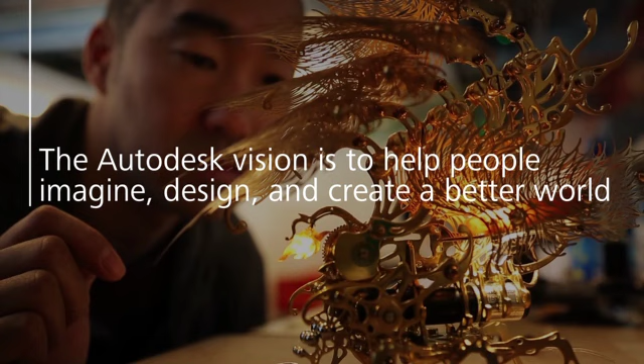Let's start our exploration about what's next with a look at additive manufacturing, not just for its own sake, but in the broader context of design and manufacturing. I want to talk about what additive manufacturing means, where it is now, and why it's so important as we enter the imagination age. Now, to paraphrase that old Hollywood saying, 3D printing and additive manufacturing have been an overnight success, 35 years in the making.

Actually, the basic idea goes back even further than that, all the way back to original science fiction movies and programs like Star Trek in the 1960s, where they had that great device called a replicator. It enabled you to make anything at any time instantly with just the touch of a button. That kind of idea and that kind of machine that could make anything you could imagine thrilled people around the world, including me. And most importantly, I think guys like these two, inventors back in the 1980s, guys like Chuck Hull and Scott Crump, who started trying to bring that inspiring vision of the replicator to life, establishing the basic concept of 3D printing.

And after years of steady development, just recently, I would say around 2010 or so, we hit some kind of inflection point, and 3D printing took off just like a shot. The media fell in love with it, and all that attention fueled the democratizing maker movement, helping grow companies like TechShop and MakerBot. All that attention was great, and in turn, it inspired all kinds of innovation. But it also led to some heightened expectations.

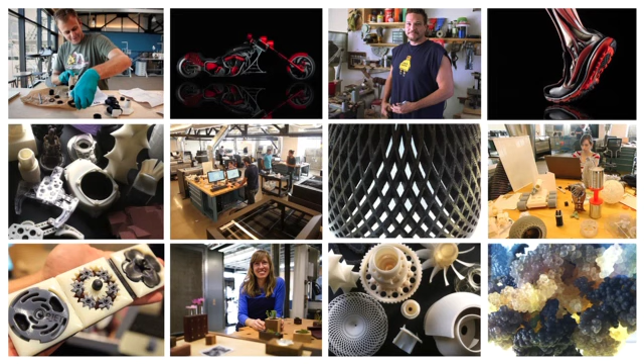Now, in some ways, those expectations have been met. Today's 3D printing is a global movement embraced by millions of people around the world. I mean, look at all the different flavors of excitement around 3D printing. By almost any metric, 3D printing is spreading far beyond the realm of creative kids and inspired amateurs. The excitement in hobby-level work and rapid prototyping has reinvigorated interest in professional-level additive manufacturing, for sure.

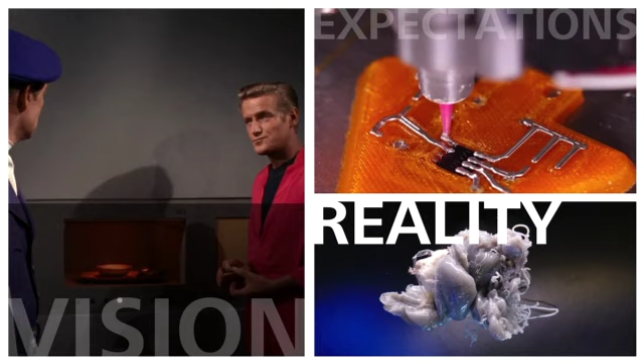But despite the bold vision and those exciting expectations, right now 3D printing has still got a lot of problems with it. In fact, it's still kind of broken, I think. And we have to address those problems if the field is going to reach its full potential.

We want it to take its rightful place alongside traditional forms of manufacturing, like subtractive or injection molding, robotic, or even biological manufacturing.

Now, a way to gauge the development of 3D printing is to see where it is on the Gartner hype cycle. If you aren't familiar with this, it maps out how evolved a concept really is versus the hype and conversation and excitement around it. In recent years, 3D printing has reached the peak of expectations, and now we're entering the trough of disillusionment, which happens when the hype about something has expanded beyond its practical reality.

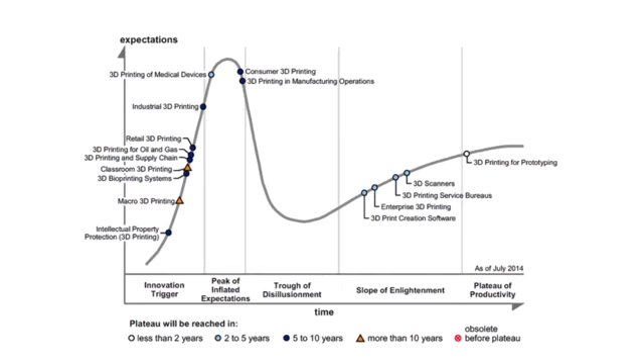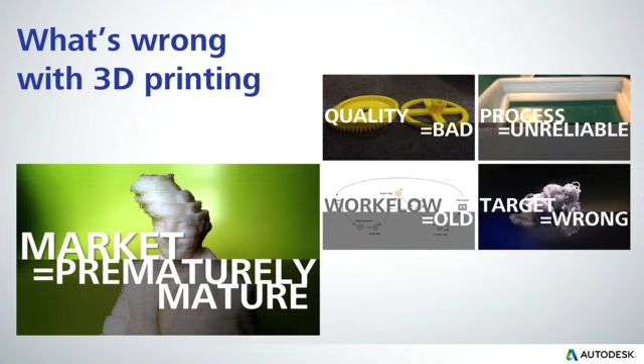Well, first we've got to seriously inspect what's wrong with 3D printing. I've been focusing on this problem, and I want to share some thoughts from Autodesk, our point of view. We think there are 5 things that have been holding 3D printing back. First one: the quality problem.

Up until now, 3D printing's been pretty good for creating prototypes and nearly good enough to become a bona fide way of creating actual production parts, but there have been problems—warping, low resolution output, and limited materials. They all keep overall quality too low.

Even worse, the process has been pretty bad too. When we click print, we have very little certainty that we're going to get a successful output. About 70% of prints fail. I used to joke that's why we've got a clear front on most 3D printers—so you can actually watch the print fail.

We need to get to the point where 3D printing is no less reliable than 2D printing. When you print on your office copier, you don't rush over to see if it worked—you just pick up the print when you're done. We've got to get to that same spot with 3D printing.

Third, we're using an old workflow, one based on more traditional forms of manufacturing, and we magically think that what we get out is going to be different just by putting additive manufacturing at the back end.

Fourth, I think we're aiming at the wrong target. We think it's a success to print the same old thing we might have injection molded or cast. Instead, we should be thinking about printing entirely new things we couldn't have made before. We need to harness all the energy invested in the amateur realm of additive manufacturing and refocus on invigorating the commercial realm.

And the fifth problem, which I think is a big one, is that the 3D printing market is prematurely mature. Companies' desire for stable business models have led to bad decisions, leading the field into premature stagnation. For example, locking into DRM-controlled materials limits the potential of exploring other materials that might be better for the field in the long run.

So those are the 5 things I think are currently holding 3D printing back. The good news is that problems like these are being addressed by thousands of companies around the world, including Autodesk. So let me show you a little bit about what we're doing to help address these problems.

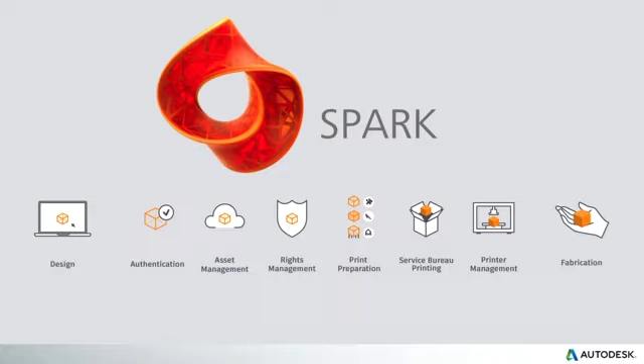First of all, Autodesk has created a new platform we call Spark. It unifies and rationalizes the entire 3D printing workflow, connecting it end to end so you can go smoothly and reliably from design to fabrication. A key part of that is a software stack explicitly created for additive manufacturing. The stack is the foundation for applications to guarantee a one-click, it-just-prints workflow.

Now, up until now, different software chains would give you a great variety of results. Here's something I printed on just a normal printer using the stock software that came with it. Failed. Here's one I printed with a slightly better piece of software. This succeeded to print, but the support material cannot be removed, so this print is useless.

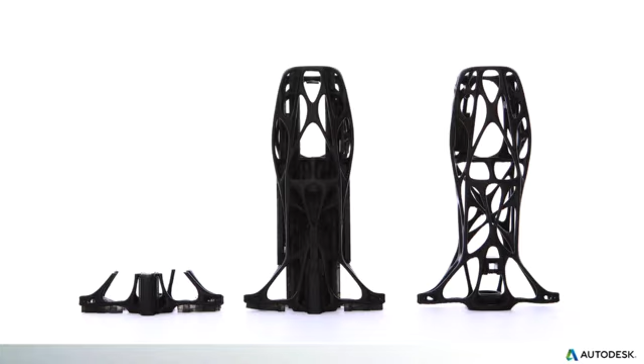By contrast, our Print Studio tools give you this—what you expect. This is the kind of outcome you expect: a designer's inspiration not tempered by the fabrication process. The inspiration just comes out the other end of the printer. Instead, it's the freedom to explore even the most complex designs, with the confidence to know it's going to be faithfully reproduced, not jammed in the printer. This is how we're going to shift our expectations from 'look, it printed' to 'look what I made.'

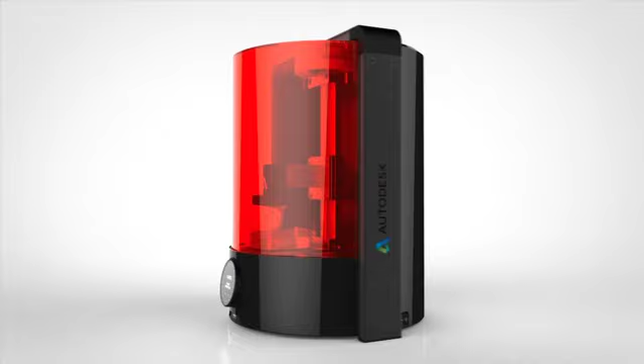I also want to let you know that last year we introduced a reference printer, a platform we put out called Ember. It's our first piece of hardware, and we created it simply to demonstrate what's possible using that software. Now you connect those two things together, and it demonstrates a pipeline that allows you to quickly and easily go from art to part.

Autodesk is doing for additive manufacturing what Google did for the mobile world. You see, they provided Android, a platform that was reliable, consistent, and extendable, and a hardware device, the Nexus phone, to demonstrate its capabilities. And that's exactly what we're doing. Spark is the reliable platform, and Ember is the reference printer.

And following that pattern, we've actually done something really remarkable. With Spark, we've made everything open. The software platform, from its APIs to its implementation, down into the firmware, they're open for contribution and collaboration out on GitHub.

Even more, the hardware's open. We've published the plans for the printer Ember online, not just so that other companies can see how we did it, but so they can use our printer as inspiration for their own innovations.

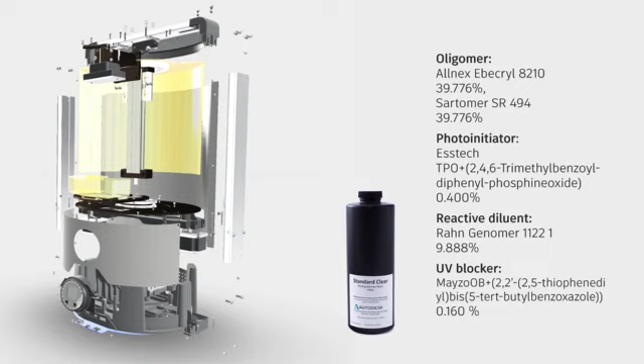Maybe even more importantly, we've chosen the open materials route. We've published our formulations. We allow new formulations to be used from any supplier in our Ember printer. And we've already seen, because of this, a number of new materials, from traditional plastics to even interesting biopolymers, specifically developed for use with Ember.

Taken together, Spark is a platform, an open one, for connecting software, hardware, and materials together into a manufacturing ecosystem. It breaks down barriers to entry, and it opens up new possibilities for innovation.

We're also working in the community to advance a standard file format, transporting design and manufacturing data, overcoming the limitations of STL. It's called 3MF.

And to help the manufacturing companies get off the ground, we've also launched a $100 million investment fund, a kind of monetary ignition or fuel for this ecosystem.

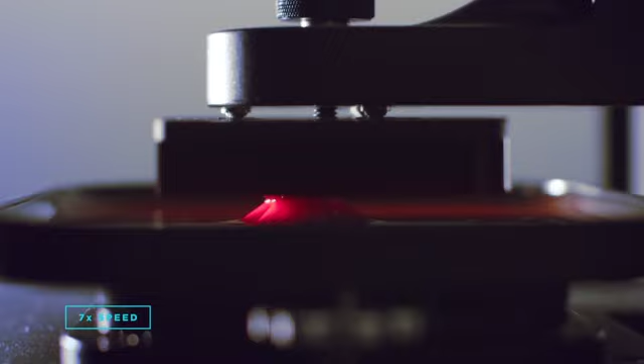And as a result, we've seen some really fascinating companies coming out. Here's one we invested in, Carbon 3D, whose super fast print technology can print in 3D in real time.

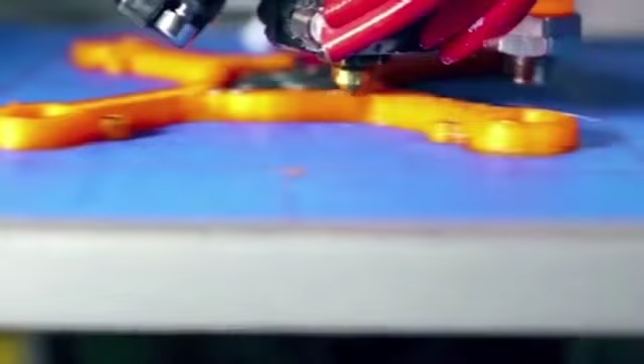Or how about these guys at Voxel 8? They're combining form and electronics into one continuous process. Look at this. Imagine printing something, and when it's finished printing, it's not just done, it actually works.

Already we're seeing a wide range of companies, hardware manufacturers, software developers, materials suppliers, product designers, adopting the Spark platform.

Now, we're doing all this work for a reason. In part, it's just to fulfill that bold vision of 3D printing and to make reality match those expectations. But here's the most important thing. We need this stuff to work because designing and making things is changing fast.

We need to add reliable industrial additive manufacturing to our arsenal just to keep up with the set of 3 interconnected transformations I want to share with you. We call them the future of making things.

First transformation, it's about how things are designed and made. That's production. The second is about what customers care about and want, which is demand. And the third is about the nature of the products we make. Let's talk about those. The means of physical production is changing.

We can't design or build things the way that we used to. Complex production methods are required to bring products to market faster. Supply chains are being disrupted, and things like microfactories and a decreasing reliance on big companies is changing the landscape. Now startups and entrepreneurs compete with established players. Using those new means of production, we see people creating even traditional things, big things like buildings, with some very non-traditional processes, forms, and materials.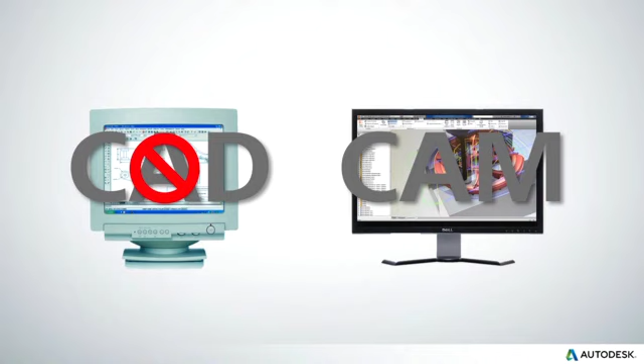Similarly, in the world of CAM, and I know I'm going to get in trouble for this at Euromold, I don't think we have computer-aided manufacturing yet. I think we have something closer to computer-automated milling, molding, and machining.

So what's been standing in the way of real CAD and real CAM all these years? I can sum that up in one visual. The classic C prompt. You remember this? It symbolizes the way we've always used computing. Traditionally, we've used computers as passive tools for execution, just sitting there with that prompt, waiting for us to tell them what to do.

So how can we use the computer for something more? How do we make it a real partner in exploration? The answers to that question are an exciting new set of capabilities that computers have very recently just begun to develop and effectively demonstrate. Now think back to Ivan at MIT and that first CAD system.

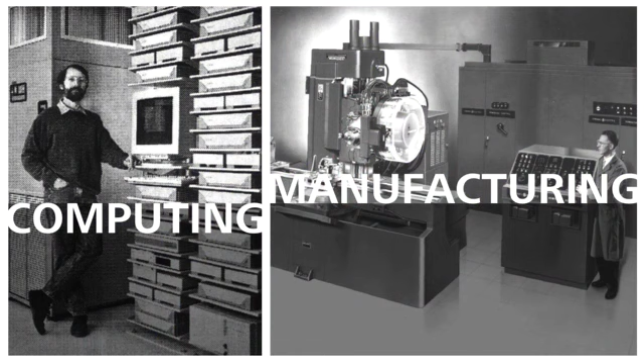Back then, there were two things, two essential resources that were extremely scarce and inflexible: computing and manufacturing. The very structure of our CAD and CAM systems is predicated on the scarcity of those two resources. But here's the thing, those days are totally over, right?

Today, computing and manufacturing power has been radically democratized, which means that the two things have gone from scarce to tremendously abundant. Infinite computing, we've already got it. This is about computing so cheap and available, it would have been unthinkable in Ivan's day.

Infinite computing is such a powerful force. Marc Andreessen used it in part of his description, software is eating the world. You heard that? It's powered by infinite computing. And in the recent years, this force has been completely digesting and reconstituting product after product, market after market, and service after service.

Now we got to get ready, because those sorts of disruptions, Spotify, Airbnb, Uber, those radical disruptions are coming to our world, turning limited computing into infinite computing, scarce manufacturing into flexible, expressive manufacturing, the kind we're going to get by fulfilling the promise of 3D printing.

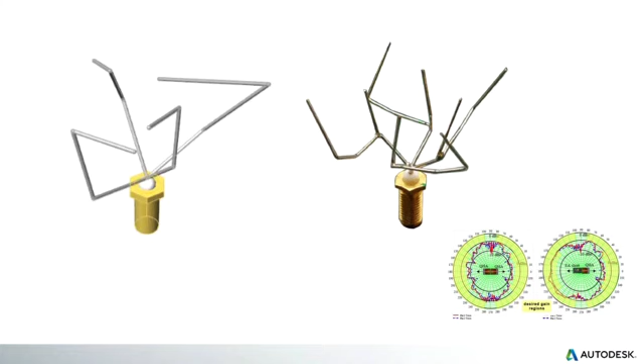But about a decade ago, a groundbreaking development changed the design of those NASA antennas forever. Engineers developed an algorithm that created and analyzed thousands of possible antenna designs automatically, simulating their performance and progressively evolving higher performing solutions. Now, this design, although it looks kind of strange, performs twice as well as the one that the human expert created.

This is an early example of generative design, but it still helps us illustrate what generative design can do for us. Generative design moves us beyond our own best efforts to best outcomes.

Let's take a look at a mechanical example. Why are bicycle frames triangular? We've built bicycles the same way for years and years, and I don't know if we've ever asked ourselves that question. Up until now, we haven't had the tools to evaluate all the options, and we haven't had the means to manufacture other shapes. But now we do.

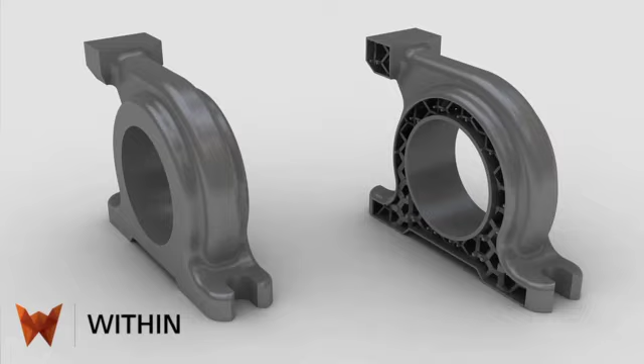Let's take a look at some of the tools that transcend those limitations and help us get to some of these provocative designs. One of them is a product called Within. It's specifically designed to optimize for performance, weight, and manufacturability simultaneously. It uses an approach called multi-objective optimization, and you can ask the computer not about trade-offs, meaning can it be light or strong, but instead give it both parameters and ask it to solve for them together.

Lattice hollow, lightweight parts that are just as strong as those that might have been cast or milled solid, they're revolutionizing industries like automotive and aerospace.

Now, historically, we've seen a big difference between the things that have been designed by nature and the things that have been designed by us. Now, there are opportunities for us to take more direction from nature, I think, in the strategies that we use.

Take bone, for example. If our bones were solid, they'd be much, much heavier, and we'd be much less efficient, and we'd require a lot more energy just to survive. It's the interior lattice of varying density and thickness that keeps bones strong and light. There's more bone where it's needed and less where it's not. In nature, form follows forces.

We can achieve the same simultaneous optimization of strength and weight in software. Now, this is obviously beneficial in healthcare. We used to see medical devices and appliances that were bulky and generic and uncomfortable, but today we can create custom devices, making them elegant and biomorphic, and make them light and strong.

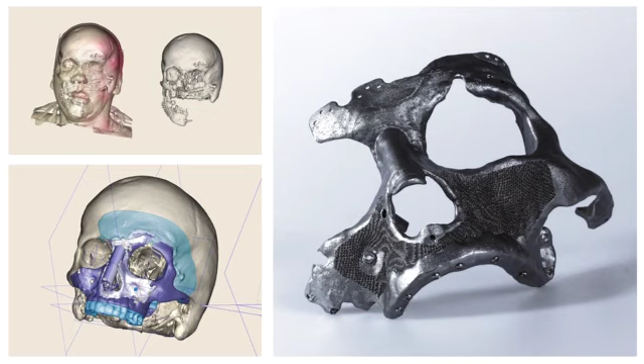In fact, as we see with this facial implant, we can imbue them with even sophisticated functionalities like specifically designed porous structure that integrates with the bone of the patient. It's a whole new level of performance for a product like this.

This part of optimization can have a dramatic effect even in other trades. Since we're here at Euromold, let's take an injection molding example. Let's think about some of the plastic parts molded for this food processor.

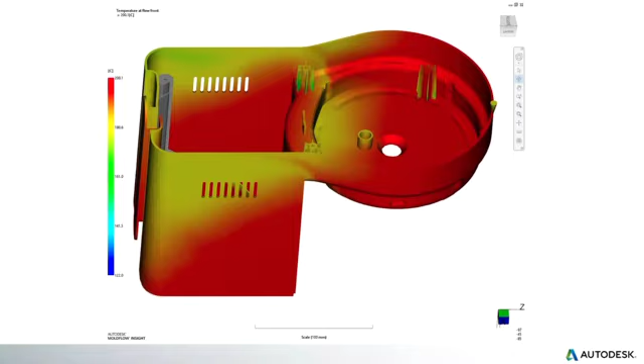Here's a scene from MoldFlow showing the in-mold temperature of one of those parts. It's super hot, it's going to take forever to cool, and it's going to warp. So we can add conformal cooling to radically change that temperature profile.

Now it's only going to take about 5 seconds to cool, part quality is preserved, beautiful, right? But how the heck are we going to make it? Here's the core cavity that produces that optimal cooling. How do we manufacture something like that with embedded cooling lines? Straight through drilling is not going to work. Well, here's how we do it.

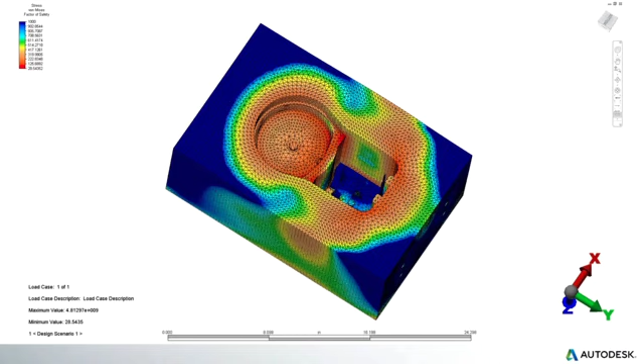Start by looking at the pressure inside that cavity. Here we can see the areas of the mold that are critical and those that are not. Then we get the design automatically optimized for strength and material. The lattice thickens where needed, and the cooling lines are automatically integrated. Nobody drew those lattice struts. The software sized them to resist the pressure in the mold automatically.

And you could print this now with substantially less material than a solid block. Perhaps you'd print this in a strong steel, it would come out quicker because there's less material, and then you could fill it with a thermally conductive material like copper.

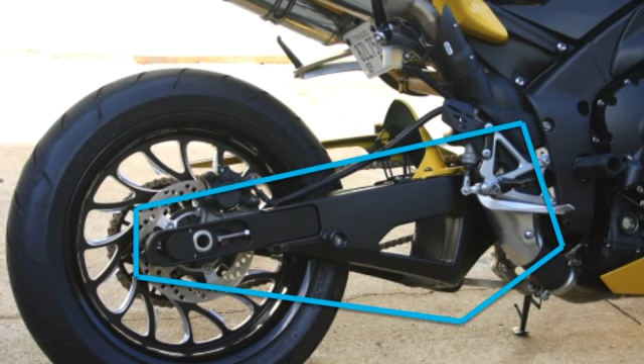Now I want to explain a little bit more about generative design, this time looking at a motorcycle swing arm. This is a structural part that holds the back wheel to the engine mount, to the shock mount. A famous biologist in 1917 said, 'The form of an object is a diagram of its forces.' I think that's actually kind of beautiful.

We've adopted that concept quite literally, translating it into the CAD world. We have a research project called Dreamcatcher that lets designers describe the forces that act on an object, and then the computer will make it. These forces can be structural loads, or they could be manufacturing methods—I want to make it this way, or this way. Or they could even be stylistic preferences.

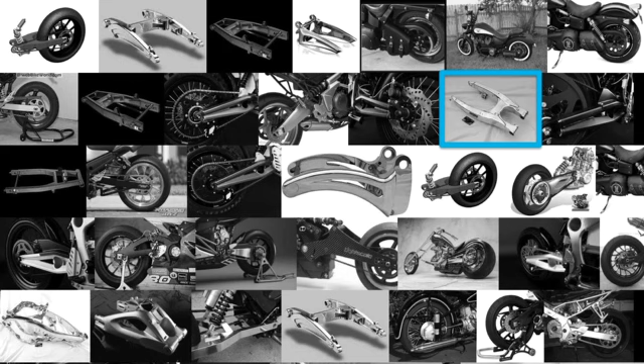Traditionally, when a designer wants to narrow down some options, they start in the solution space of their recollections—things they might have designed before. But truthfully, these spaces that we have to search through are getting enormously large these days.

What happens if you want to swap out a material? What happens if performance requirements change? Design permutations and trade-offs can boggle even the most experienced design minds. Traditional CAD tools, I think, are completely played out for this type of example, even when paired with design geniuses. They're going to fail to solve the complex problems of the future.

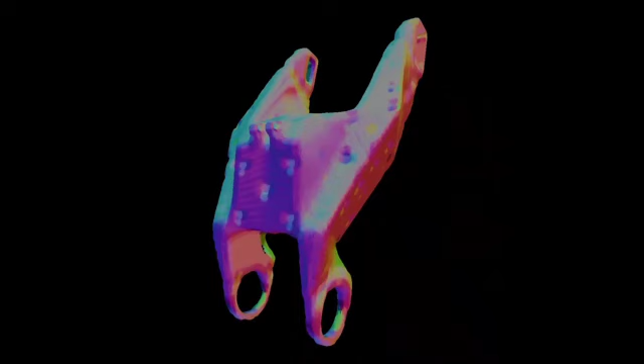So instead, let's take a system like this, called Dreamcatcher, that solves the problem directly. Given the forces, it creates form right where needed. In this video, you see material that's being moved to just where it's needed. It's both being eroded and added.

Think about doing this for all types of materials—aluminum, titanium, whatever. I actually brought a printed version of that exact part for you guys to manipulate after the talk. This is a version of a part for that swing arm if it were printed in titanium. It'd be too expensive for me to bring all the way to Europe, so I printed it in nylon instead. But it's the same form.

One of the things that's so amazing to me about it is, check this out—it's actually asymmetric. Look, this side's solid. This side's got a hole. Why is there a hole on one side? The chain's on one side, and makes an asymmetric load.

But if you go outside and look at motorcycle swing arms that are out in the parking lot, you'll see most of them are symmetric. What I think is so interesting about this is, even if you do not choose to manufacture this design, the software is able to give you an insight into your problem.

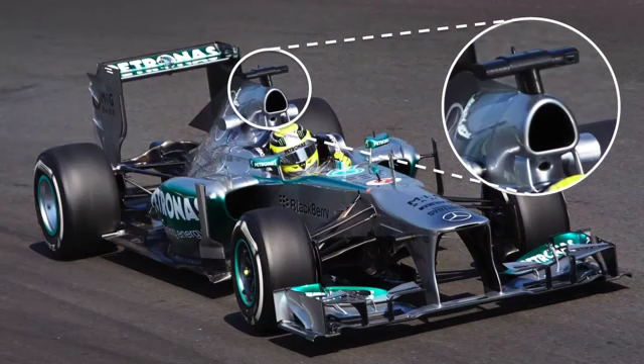Okay, I'm going to take a deeper example on Dreamcatcher to show you the workflow. Let's say that I want to design the roll hoop for a Formula One race car. It's that part right behind a driver's head.

Now, the old way to do it would be to start with an idea in your head and then design it in the computer, and then you test it to see how it works with analysis software, and you do this exactly one time.

With Dreamcatcher, you start an entirely different way. You share the goal with the computer, telling it not what you want to do, but what you're trying to achieve. You describe your problem as a problem well stated to the computer.

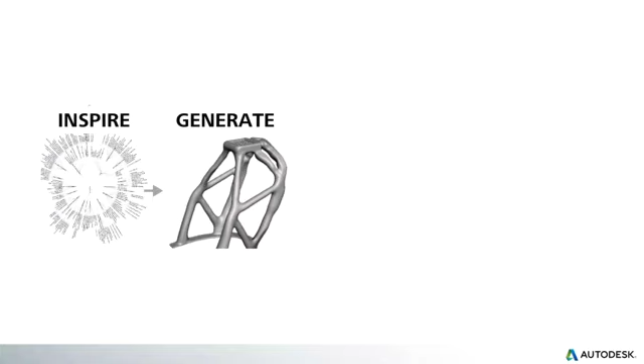That's the inspiration phase. Then using generative methods, it's the computer that actually creates the large set of potential solutions, automatically synthesizing them using cloud computing to address that problem. But here's the key: in the time it would have taken you to do just one design, Dreamcatcher has done every one of them.

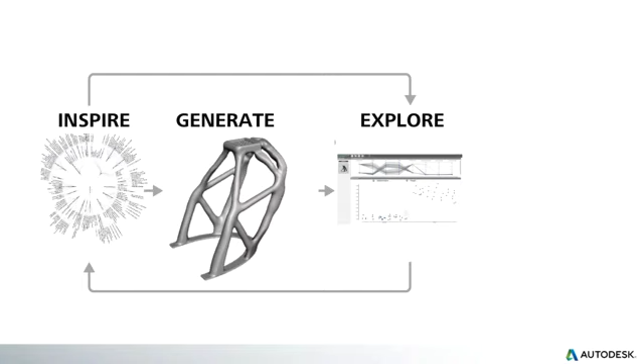And then the design proposals are made back to you in an Explore tool, so you feel like you're steering through the solution space, and you get to understand the trade-offs between various solutions. Now, you might find something interesting that helps you redefine the problem again, and you can repeat the loop. But ultimately, you're going to select one to fabricate.

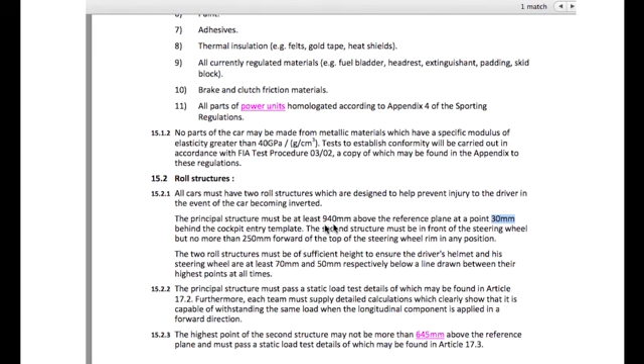Now let's take a look at this in action. We've actually taught the computer using natural language processing, believe it or not, to read the spec of the Formula One sheet. So it downloads that from Google, and it looks in there to find the specifications. Next, you're going to see it translated into an intermediate format that it uses internally called SysML. It keeps the requirements in mind. Now, this is all happening automatically by the computer.

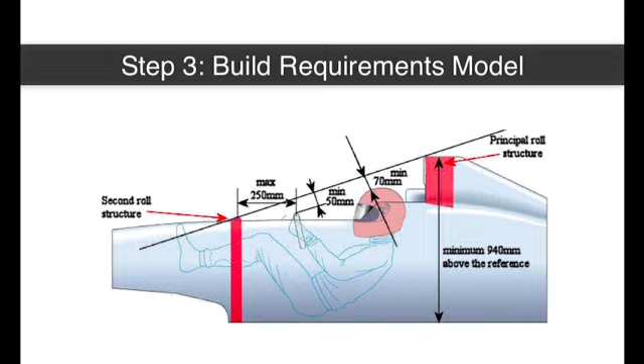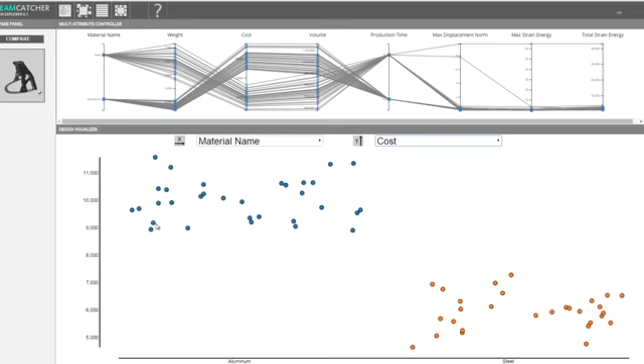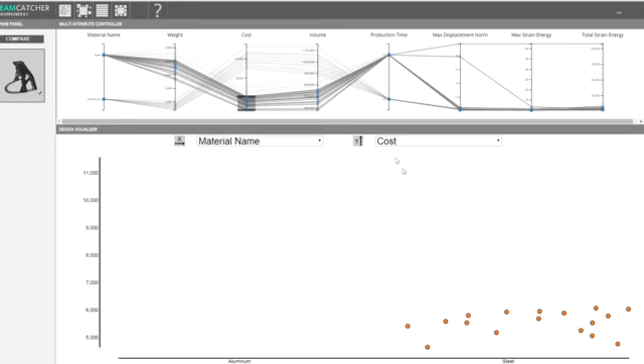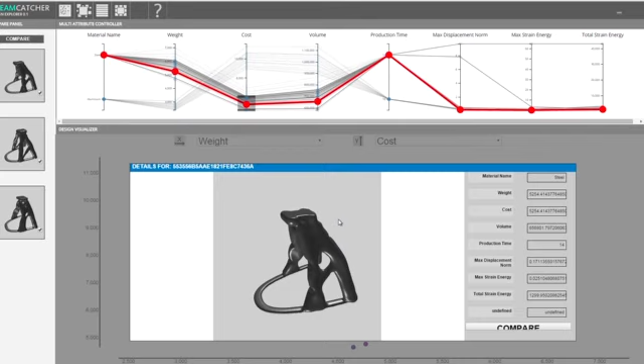Every one of those dots that you see in the diagram is a well-optimized solution to the problem. And what I'm doing here is picking between them and looking at the trade-off between material and cost. In a minute, I'm going to change from material to another type of trade-off. I can explore this highly multidimensional space of solutions that the computer has provided for me. Here's a couple that I'm saving to investigate for later, for deeper inspection. You notice I never drew anything.

Okay, so I found clusters and interesting combinations, and ultimately, I decide I want to print it. So here's a roll hoop that was designed by the computer from a requirements document, with no human drawing.

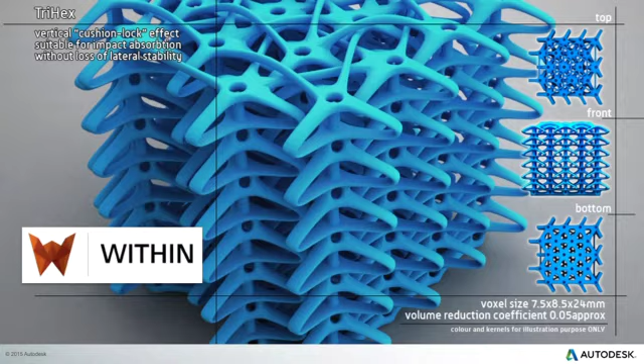And just as you've done with that kind of outer topology, you could take some of the inner latticing work, that bone structure, and bring it inside to engineer at the micro level. You can create new types of functionalities inside of objects, changing their behavior, in fact. I like this example: this lattice structure, when you compress it, actually increases lateral stability due to the locks that it has. And you could bring all that stuff down to multiple scales.

We don't have to design big things. We could design things at the micro scale, too. We're working together with Lawrence Livermore Laboratory to create architected materials that behave differently on the Ashby chart. So, for example, when you heat up these particular kinds of metals, they contract, they don't expand. Or when you stretch them, they actually shrink.

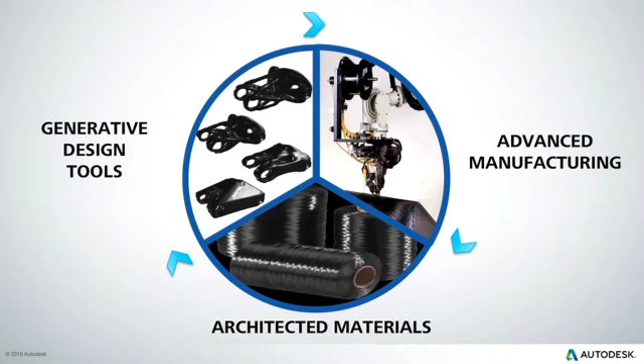So what we just saw was the computer becoming creative, generating ideas for us and with us, helping us develop them. Now I want to talk for a minute about another ability that has been traditionally reserved for humans, and that's the ability to learn. As computers are getting better at being aware of what's happening around them, they won't start dumb and stay dumb. They're going to get smarter and smarter over time.

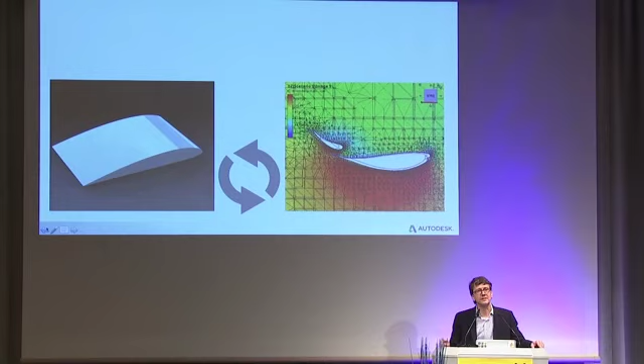We're going to take that exact same thing and apply it to design software, bring it to analysis. The funny thing about all the analyses we run is, what happens when we're done? We throw it away, the computer has amnesia about it. Every time we want to run another analysis, like computational fluid dynamics, which is very costly and compute intensive, it starts from scratch again.

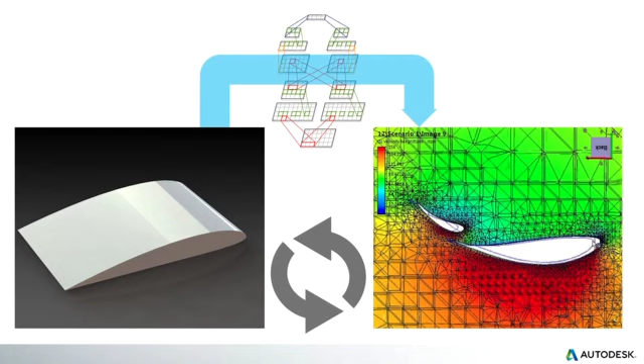But what if instead we put a machine learning system in the loop? Every time we analyze something for its aerodynamics, we got an impression of the connection between cause and effect, and we did that over and over again. Eventually we won't need the CFD analysis tool, because we'll have a machine learning system that has a hunch, an idea, a gist of what aerodynamics means. Then I could show it a brand new thing it never saw before, and it could give me an opinion about whether or not it was aerodynamic. Of course, it could always go in and really do the analysis when I wanted it to. But the important thing is computers are very quickly going to start having opinions.

I think that's pretty remarkable. It's interesting too to imagine, what if the computer were doing this in its off hours? What if it were generating new forms on its own, putting them through analysis, and seeing the relationship of cause and effect? Systems that understand those linkages start getting hunches about the things we're working on - that's the kind of taught machine I want to be working with. I think that taught machine starts changing the partnership we have with design tools. We get a computer aiding designer, one that rises to help us meet our goals. That's the kind of computer I want to hire.